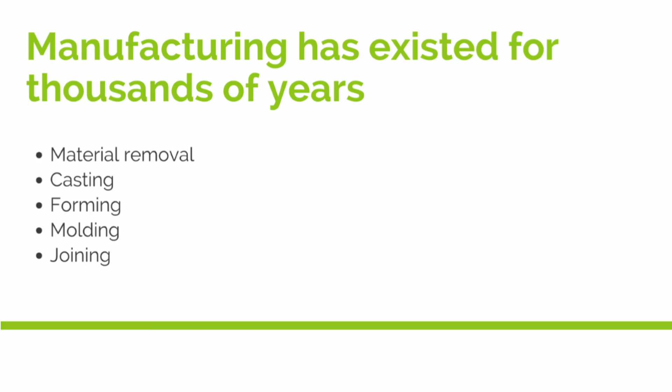So to put this in perspective, manufacturing has existed for thousands of years. Over the past thousands of years, specific manufacturing processes have been developed. We've developed material removal, or subtractive manufacturing, where you take a block and remove material to get your part. Casting, where you pour liquid metal into a mold. Forming, molding, joining. So over thousands of years, we have about 5 or 7 manufacturing processes.

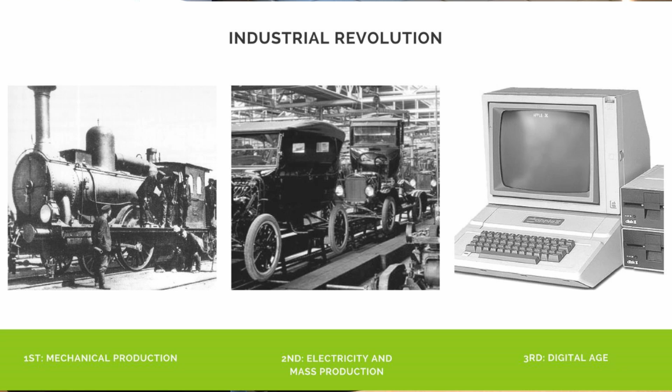And over those years, we've had some industrial revolutions go through. The first industrial revolution was when the steam engine was made, the mechanical revolution. Then a second industrial revolution where electricity was invented and also mass production, so the assembly line was created. We had a third industrial revolution with the digital age, computers, internet. And now there's talk of a fourth industrial revolution, which could involve cyber physical systems, artificial intelligence, IoT, blockchain, and additive manufacturing.

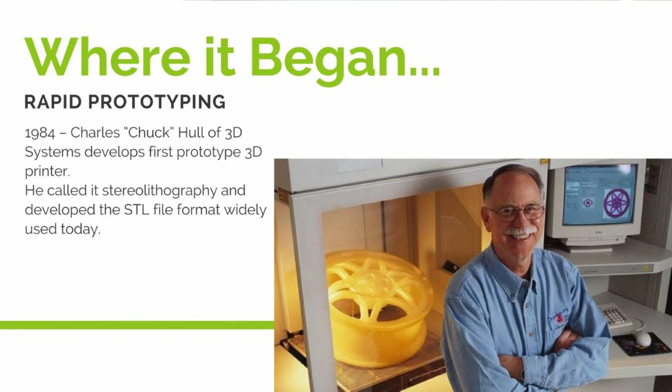So when and where did additive manufacturing begin? It actually began about 30 years ago, in 1984, by a guy named Chuck Hull. He invented additive manufacturing with the first type, called stereolithography, and he also invented the STL file that we use today. Since 1984, there have been 7 different processes of additive manufacturing invented, and they're listed above.

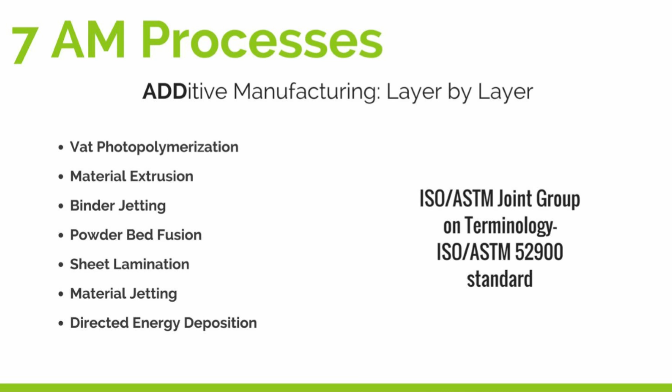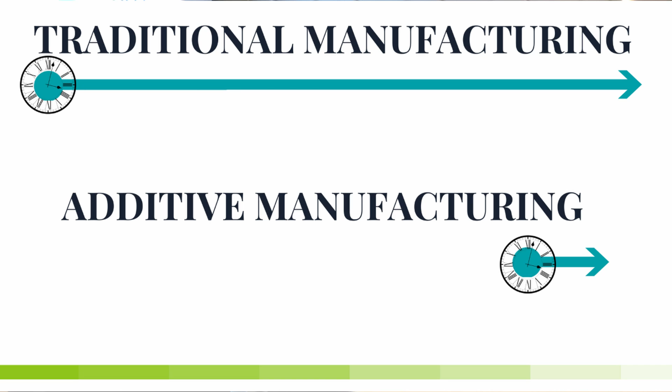So to put that in perspective: thousands of years we had traditional manufacturing, thousands of years, and we perfected it and have been using it for thousands of years. In the last 30 years, we had an additional 7 processes identified. 30 years. So what does the next 30 years look like? Just wanted to start off with that.

So let's jump right into additive manufacturing. There are 3 basic steps, and anyone can do it. You have your design, your slice, and your print.

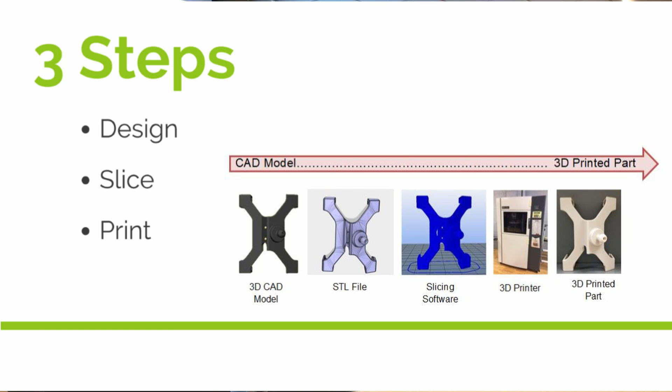Design, CAD software. Has anyone ever used CAD software before? Awesome, cool. What software have you used? Just CAD? AutoCAD?

Okay, cool. So computer-aided design software, there's hundreds of these. A lot of them are free, you can go online, download them, and start using them today. Fusion 360, all students have access to this great CAD software. It's almost like SolidWorks, if anyone's heard of that. It's very complex. People using it in industry, you can be using it today too. You download it right online, and students have access for free. Then there's ones like SolidWorks, Inventor, OpenSCAD, Rhino, CATIA, and the list goes on and on. This is where you take something you draw and turn it into a 3D model. So that's computer-aided design software.

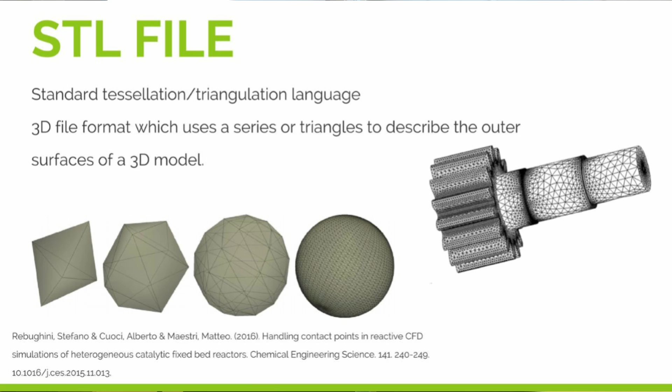Once you have your design file, you have to save that as an STL file, which stands for standard tessellation or triangulation language. What this does to your file is it takes whatever part you made, for example on the right, which was a solid part, and puts all these little triangles all over your part. The more triangles you put, the better quality your part is going to be. For example, the sphere on the bottom of the screen: if you only put 4 triangles on, it doesn't really look like a sphere, does it?

But the more triangles you add, the more defined the shape becomes. That's how you deal with resolution of your part and higher quality. That's how you get your STL file.

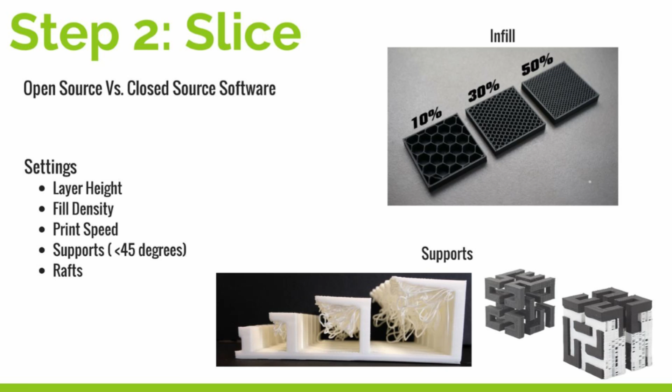Once you have your STL file, then we can go into slicing it. Every 3D printer, you need to slice your part. 3D printing is adding it up layer by layer. So in slicing software, you put it in there and can do all kinds of cool things with it. This is where you can play with infill pattern, layer height, speed, rafts, and support structures, which are really important.

I'll pass around this part. This part was stopped halfway to show you the infill pattern. You'll see a honeycomb structure inside. Your infill you can adjust however you want. You can make your part completely hollow inside, or 10%, 30%, 50%, all the way to a completely solid part. So you have the ability to control the density of your part.

I'll pass this around. Another thing you can do is add support structures. Anytime you have an overhang on your part, you're going to need a support structure holding that up, just like scaffolding on a building.

What's really cool now with 3D printing is, for example, this part down here. Some printers have 2 extruder heads. You can print one in plastic and one with your model material, one with your support material. So your part material is black, your white material is support. After this part comes off the printer, you plop it into water and your support dissolves away. So they're dissolvable supports, which allows you to create very complex shapes that you couldn't create traditionally.

I'll send around this part and it shows you the complexity of a part you can make. I'll also send around a part that shows you support structure. This is a little penguin guy. You'll see support under his nose, under his hat. And again, if they're dissolvable supports, you just plop them in water and they'll all dissolve away. Or if they're just your regular supports, you'd have to pick them all off. So you can see the before and after of this penguin guy.

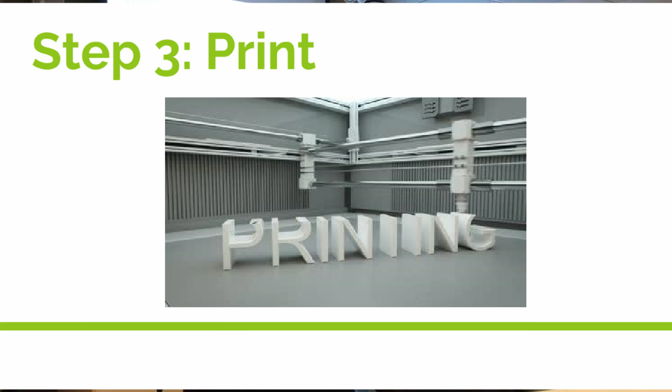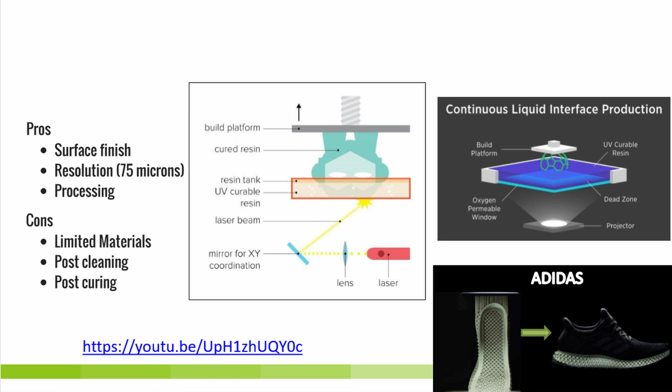Your third step is print. So you design, slice it, and you can go right into printing if you have a printer. Now we're going to get really technical real fast, but I want you guys to understand the possibilities in additive manufacturing. Most of the parts I just sent around are traditional parts made off a desktop printer, the kind you've probably seen, with a reel of plastic that goes into the extruder head, heats it up, and melts it down layer by layer. That's one type of 3D printing, but there are several types. I want to go over those with you quickly to show you what's going on in the world of 3D printing. This is the first type.

What it does is you have a liquid material, a liquid plastic called a photopolymer. For the girls in the room, it's like gel nail polish: you put it on as a liquid, it goes under UV light, and it hardens. That's the same process we're doing here, but layer by layer. A UV light hits the photopolymer liquid plastic and solidifies it, continuing layer by layer. This process is called vat photopolymerization — it includes a vat of liquid photopolymer. It's also called stereolithography, which I talked about earlier. This was the first type of 3D printing, invented in 1984. Now they've upgraded this technology, so the part looks like it's growing out of the liquid, which is really neat.

And I forgot — are we connected to the internet? Oh yeah, we'll have to get off this. I have quite a few videos to show, fun videos. Are they embedded in here? No, they're just links. Is that where you want to go? Yeah.

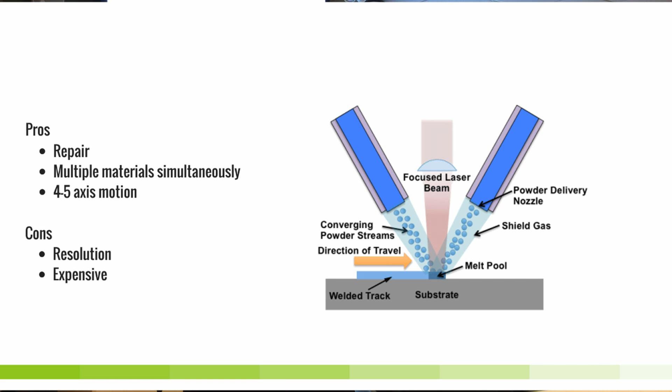The second type of 3D printing uses a laser or energy source, and your material comes through as a powder. The powder and the laser come together like in the picture, and it solidifies, doing that layer by layer by layer. If any of you have seen welding done before or heard of it, that's kind of what this is, but it's very glorified and can do a lot of cool other things.

This is the only type of 3D printing that's called directed energy... Oh, I'm not connected to that anymore. Silly. Okay, it's called directed energy deposition, and this is the only type of 3D printing process like this.

So normally, you're 3D printing in one direction, going layer by layer by layer by layer. This type of 3D printing is on a 5-axis head, just like a CNC machine. So it can deposit over here, deposit over here. It has 5 axes to deposit. So this type of process is used a lot for repair features, and I'll show some of that later.

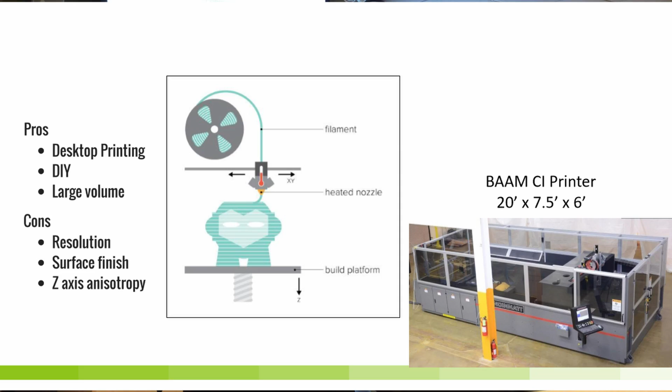The third type of 3D printing process, which you guys are most familiar with, is material extrusion. In this process, you have your plastic reel, or it could be a pellet form, and it goes into the extruder head, it heats it up, and deposits it layer by layer by layer, like a hot glue gun. There's a lot of cool things happening with this.

So we're familiar with the desktop printers, but there's big area additive manufacturing, or for short BAAM, where it's 20 by 7.5 by 6 feet long, and they're actually 3D printing bodies of cars in these printers, which is really neat.

Fourth type is called binder jetting. This process uses a powdered material. Any type of material can grind up into a powder we can use, so metals, plastics, ceramics, sand - this is what we're using.

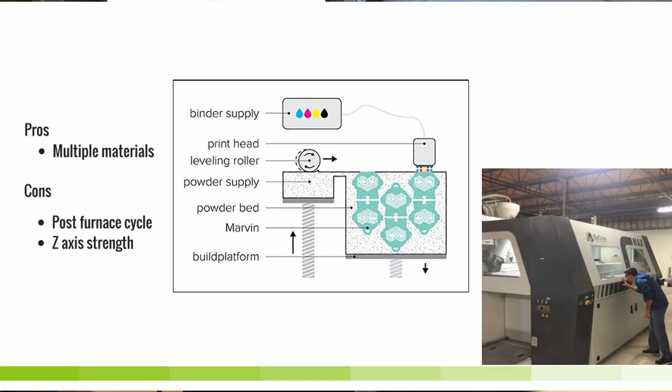How this process works: it rolls out a layer of your material, and then an inkjet head comes over and squirts out a glue-like substance. Just like an inkjet head on your 2D printer that prints with ink on paper, it's the same type of inkjet head, but instead of ink, it has glue in it. It does that layer by layer.

A huge industry utilizing this is the sand casting industry. If you're familiar with it, you make a mold out of sand and then pour liquid metal into it to get your parts. The automotive industry uses this a lot - Ford, for example, has been utilizing 3D printing for probably 20 years.

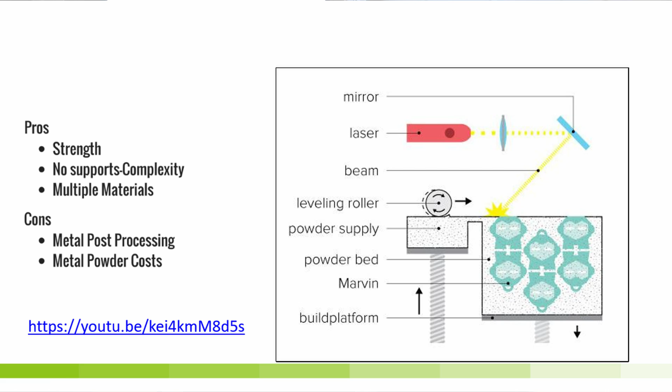Fifth type is called powder bed fusion, and I'll send some parts around that were produced by this. Again, it's a powdered material, but instead of a glue like binder jetting, it's using a laser. It rolls out a layer of your material and a laser hits that powder and sinters it, making it solid, and that happens layer by layer, building your part up.

I have a metal part here I'll pass around. It's a showpiece to show you the capabilities of 3D printing - lattice structures, support structures, internal cavities that really show the abilities of 3D printing.

So that's metal - I'll pass around the plastic one. What's really cool about this technology is all the loose powder that's not becoming a solid acts as your support, so you do not have to add any support structures for this type of technology. Anything that moves or has a space in between acts as loose powder, so you can create things that are movable without any assembly.

I'll pass these items around to show you that - and this ball bearing. Traditionally, a ball bearing is made with an outer case, an inner case, and they have to assemble every single ball inside - there's about 16 pieces that go into one part and it's assembled together. With 3D printing, this part comes out of the printer just like this, no assembly required, and it's able to move.

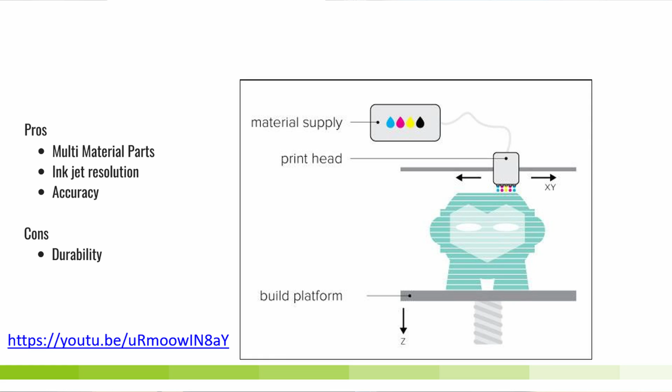The sixth type of additive manufacturing process is called material jetting. This also takes an inkjet head, but instead of a glue-like binder, like binder jetting, it actually has your material. So it's your liquid material, whether it's plastic or a photopolymer, and it squirts out that ink, your material, layer by layer by layer and builds up your part.

I have a couple pieces that were made by that process. What this allows is you can print with multiple strengths of material or multiple materials all at once. You'll see some of these pieces, like this one that has a hard outer surface, and then inside is very flexible, and this was all printed at once.

Then you'll see this little globe here. It looks like a gear is inside, and it looks like someone placed it inside, but no, this was all made layer by layer by layer. This process also allows you to use multiple colors at once, so I'll pass all of those pieces around. There's a lot of them. There's also a little gear that I'm passing around, and again, it wasn't assembled, it comes out of the printer just like that.

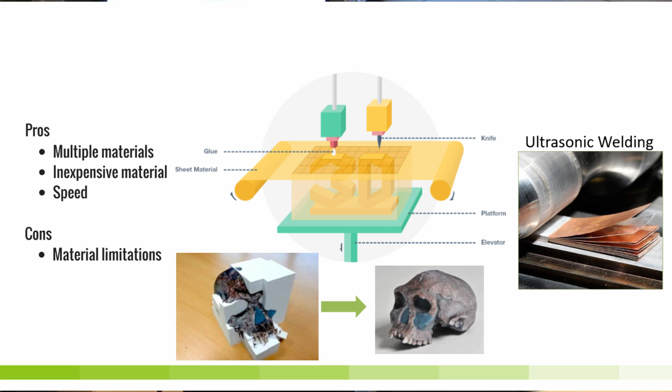And the last type of 3D printing, so we've covered 6, this is the last one. This is called sheet lamination. This process takes sheets of material, in this case limited to paper or metal. It takes a piece of your printer paper, glues it to the next piece of printer paper, and then a knife or laser comes out and cuts that layer. It continues layer by layer. Once you're done, you take your whole block, looks like a cake of white paper, like that skull, and you break it away to find your actual part. You're able to use ink as well, so you get cool colors and designs. I have one piece made with paper sheet lamination that I'll pass around to you.

For metal, how that works is with ultrasonic welding. You get a piece of sheet metal and ultrasonic weld it to the next piece of metal, and that continues layer by layer.

So we covered the 7 different types of 3D printing processes. Now I want to go over what materials we can use for additive manufacturing. The most familiar and used is polymers, your plastics, either in filament form, powder form, rubberized form, or liquid form. However we can get our plastic, we can use it.

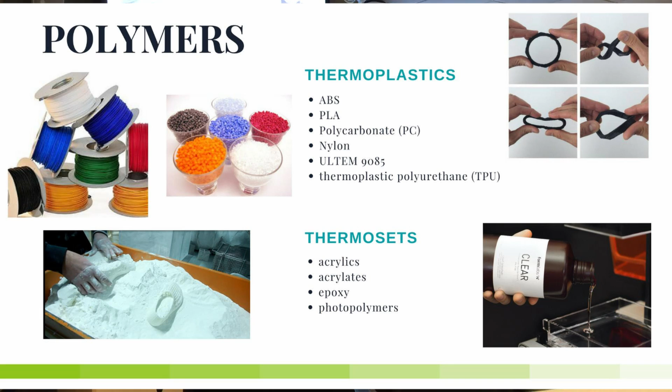Metals - if you can grind up your metal, you can use it in a 3D printer. So you have a whole list of metals. Pretty much there's no restriction to what metal you can grind up and use.

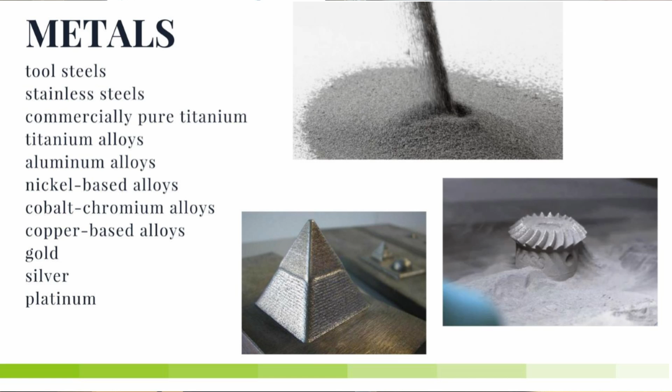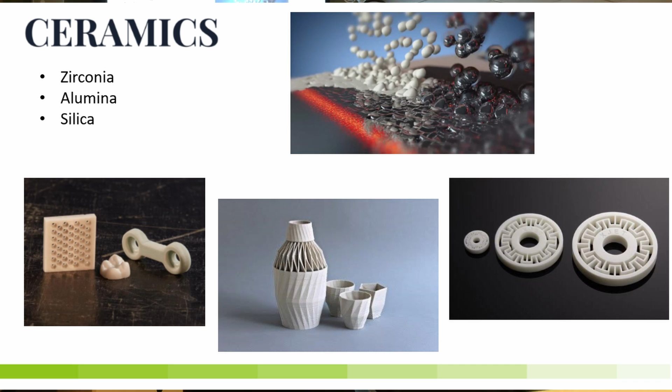Ceramics - I have a ceramic piece here, so your zirconias, alumina, silicas. The part I'm going to pass around was made with a material jetting process. It's a liquid ceramic slurry that gets jetted out, and then UV light cures it layer by layer. This printer is at the Youngstown Business Incubator where I work. It's from Israel, called the XJet 1400. It is the only one in the United States, and the 3rd in the entire world. If you ever want to come see it, we welcome everyone to see that and our other equipment down there.

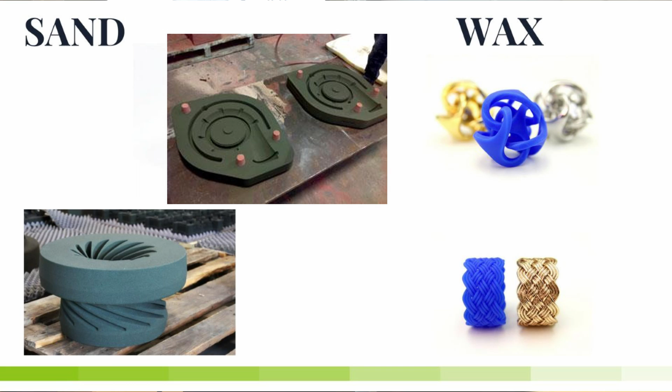We can print with sand and wax as well. I have these two materials on the same slide because they're used for tooling aspects. I mentioned sand casting before - has anyone heard of sand casting or investment casting? These are 2 types of traditional manufacturing. Sand casting has been around for thousands of years: you take a mold, fill it with sand, pack it down, then pour in metal and get your parts. With 3D printing, we can now 3D print the sand molds and cores and then pour in your metal traditionally. So we're just utilizing it for tooling aspects, not 3D printing end usable parts.

Another example, for wax, is the jewelry industry. All your jewelry - rings, necklaces, any very delicate or intricate metal piece - is made using investment casting. How investment casting works: someone carves out a wax pattern that looks like the piece of jewelry, for example the ring I'm wearing. They carve this out of wax, then dip the wax pattern into a ceramic slurry. It hardens, they burn out the wax, and then pour in the metal that becomes your actual piece of jewelry. That's how you get jewelry.

Traditionally, for hundreds of years, people would take wax and carve out shapes to make jewelry. Now with 3D printing, we can 3D print your wax out and then do it traditionally. So wax patterns and sand casting molds and cores are 2 ways we use 3D printing for tooling aspects. I'll pass this ring around - it's not made out of wax, it's made out of plastic, but we can also burn that out and utilize it for investment casting. A fun fact for any Cleveland Cavaliers fans: their championship rings were 3D printed wax patterns.

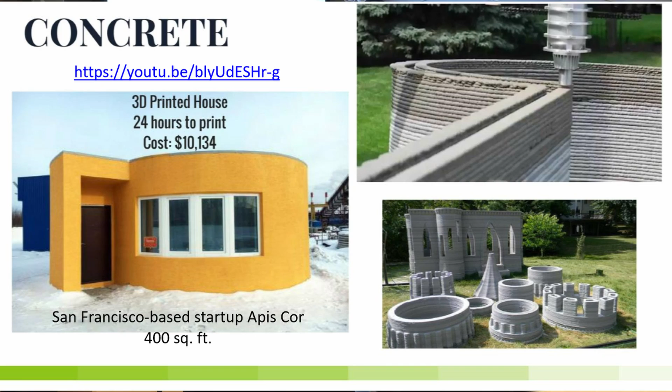400 gallons or 1,500 liters worth every hour. That's one bathtub full of concrete every 3 minutes. Concrete's perfect for this because you need something that you can squeeze out as a liquid and then very quickly turns into a solid. So as the 3D printer puts down layer after layer of concrete, it builds up a continuous solid wall.

This 3D printer is designed in a way unlike any I've ever seen before. Its main body is in the center and it has a long arm that can travel in a full 360-degree arc and move in and out. It can print up to 1,420 square feet or 130 square meters, the size of a 3-bedroom house. The only thing the robot can't do are things like structural beams, windows, doors, and the roof. These things are still added by good old-fashioned manual labour.

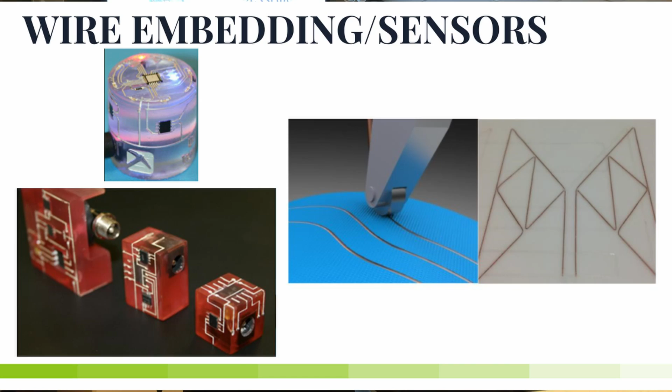Wire embedding. So not only can we print with plastic, but now we can print with plastic and also embed wires while we're printing. UTEP, University of Texas El Paso, has one of these systems. They produced it. It's called a multi-3D printer system. It has a 3D printer that prints in plastic, and then it'll pause, it'll embed wires, and then it'll continue printing plastic. You can see some of the cool things they're doing with CubeSats, little satellites they send up into space. They can embed all the wires and stuff, send them out. They'll collect all the data and they'll come back. I don't have any of the wire embedded pieces with me today.

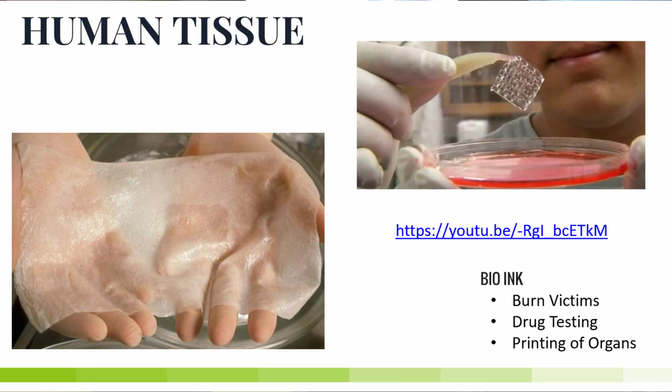And human tissue. Another really cool material that we can really start looking into is the human tissue. You have an example of skin up there. Some of the reasons we want to do this: burn victims. If someone was really badly burned, we can go ahead, scan their arm, and deposit new material down onto their arm. I'll just have this video play, and it'll talk about the rest of the cool things that are going on.

I'm Dr. Bonassar, and my lab makes ears. The invention that we've discovered is a way to print living cells in a material that can be used to reconstruct tissues in the body. My laboratory is interested in regenerating cartilage wherever it's found in the body. The process starts with a scan of an ear. We sit someone down in a chair, and we have a camera that spins around their head and takes a 3D image. We then can very precisely map out the topology of the ear. The next key step is developing the ink for this printer. This ink is actually a living ink. It contains living cells. It's alive when we put it into the printer, and it's alive when it comes out. The real power of the printing technique is that it can be used to make geometries that you just can't make with any other technique. You can make parts with holes in them. We can layer and cover and put different cells next to each other to create really the complex organs that make up our bodies. After 2 months in an incubator, the tissue fills in and looks white, just like real cartilage. The implants that we're making are not rubber or plastic. They are alive. They grow inside the body or out.

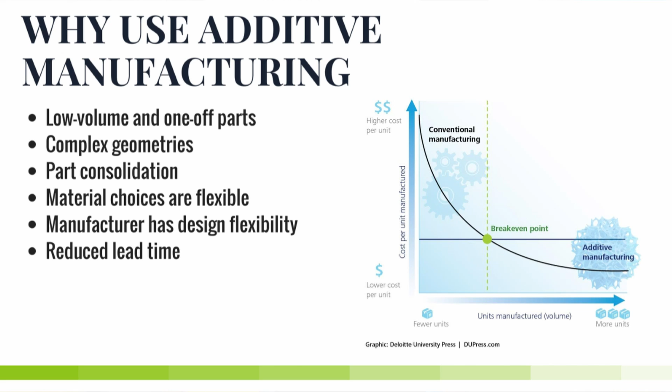Okay, to quickly go over why we would want to use additive manufacturing: it's really cool, everyone wants to use it, and a lot of the population refers to 3D printing as that desktop printer where you make little trinkets, keychains, and cool things. But as I just showed you, there's a whole other area, and people have been using it for 30 years now. So car parts, the automotive industry—Ford, GM—the aerospace industry—Boeing, Lockheed Martin, GE—they've all been utilizing additive manufacturing, and they're all utilizing it for low volume. You're not going to mass produce with additive manufacturing, at least not right now. It's low volume, high customization, and high complexity. Put all those together and you have a great area for additive manufacturing.

Part consolidation is another benefit—I might have examples later. You take a part that used to be 30 pieces assembled together, and now it's one piece. So you're saving on time, energy, no more assembly is required, plus reduction of material and weight. There's also reduction in lead time and reduction in tooling costs. There's a whole area of reasons why you'd want to use additive manufacturing—you just have to find that sweet spot and get into it.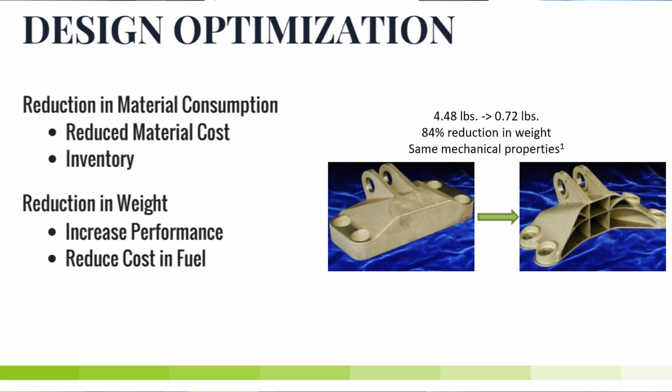Design optimization is a huge area for additive manufacturing, and this is where the hurdle is in 3D printing. For thousands of years, we've been designing for traditional manufacturing. We've had restrictions on designing, told to design a certain way. Now with 3D printing, design is kind of free. You have the ability to create anything. Anything you can design in a CAD software, you can now 3D print it out.

And you can utilize this to reduce weight and create complexity. For example, this is a GE engine bracket. Traditionally, it's a block of metal, and you shave away to get your part, so you have wasted material that you scrap, and the part is 5 pounds. With 3D printing, it's now under 1 pound, an 84% reduction in weight. This is a part that goes on an airplane, so less weight means less fuel consumption, which saves costs.

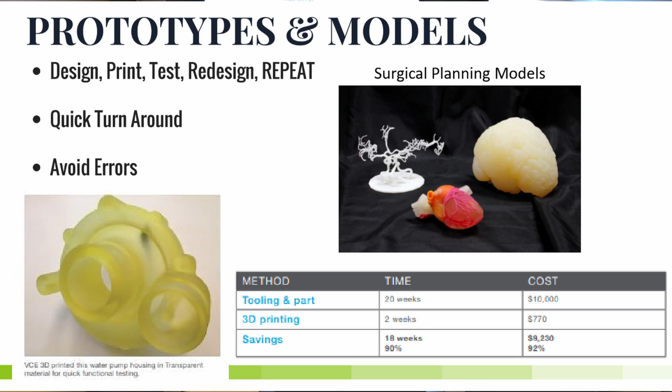Applications for 3D printing, and I've been talking about them throughout, but prototypes and models. This is why 3D printing was originally invented, for prototyping. You can quickly 3D print an item out, test it, see if it works. If it doesn't, you go back, redesign your part, and 3D print it out again. It's a very quick turnaround time, allowing for different design iterations fast.

And then models. For example, back to the medical industry, they're using models for surgical planning. They can 3D print out the patient's heart or brain, see what's going on, do the operation, see how it's going to turn out, and then actually go forward with the surgery.

Tooling applications, so I talked about this briefly, sand casting and investment casting. This is a huge area for additive manufacturing. It's the low-hanging fruit because we don't have to do qualification and certification, since you're just printing the tooling and making the part the normal way you would.

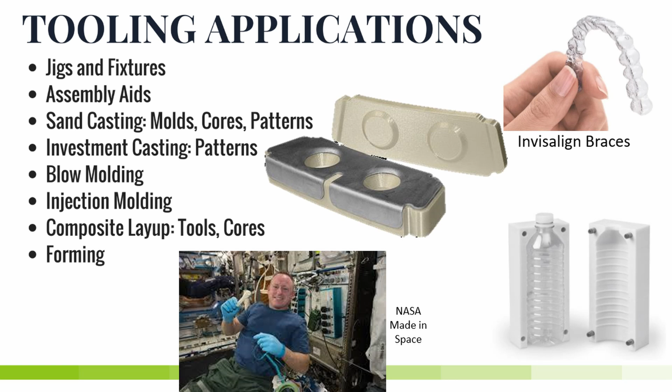For example, Invisalign braces - are you guys familiar with Invisalign braces? They don't 3D print the plastic piece you put in your mouth, but they 3D print the mold, and then that mold they vacuum form plastic over, and that's how they get your braces.

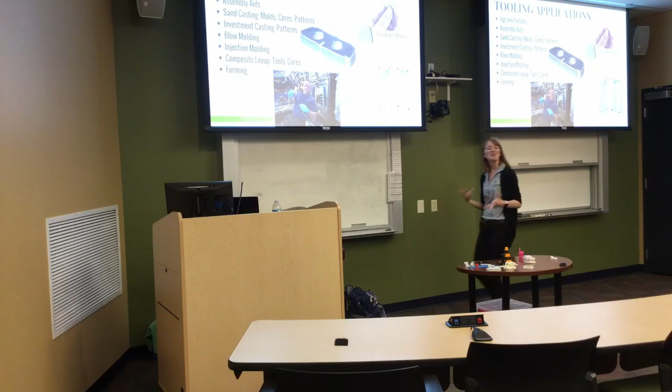So Invisalign is producing these molds in quantities of millions. They are mass producing using 3D printing with mass customization, because every human body is different, so your mouth is going to be different from mine. That's why 3D printing is perfect for these molds. The dental industry in general, the medical industry, is perfect for additive manufacturing.

As your teeth move, they have to make a new, correct clear brace, which means they have to scan again and make another one. So it's not just one mold - they have customization from human to human, but also customization over time, since you get a different retainer every month or few months. So every single one of those is a different mold, which is being 3D printed.

I have a picture of the International Space Station. NASA is into additive manufacturing - they have 3D printers up there. To give an example for tooling, if they needed a tool, they would tell us down here on Earth, and it would take about 3 months for them to get the tool back in space. Now they have a 3D printer on the International Space Station, so if something breaks or they need a tool, they can just 3D print it out and get it when they need it.

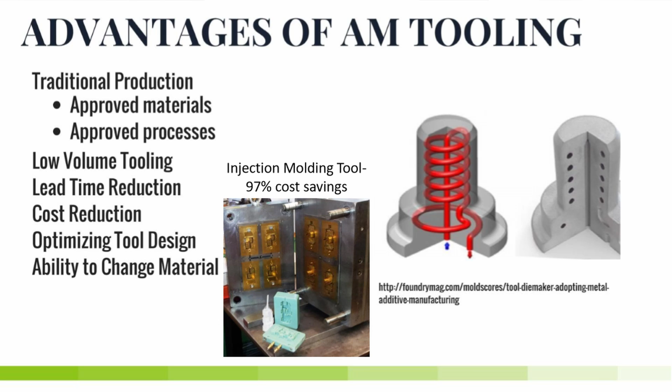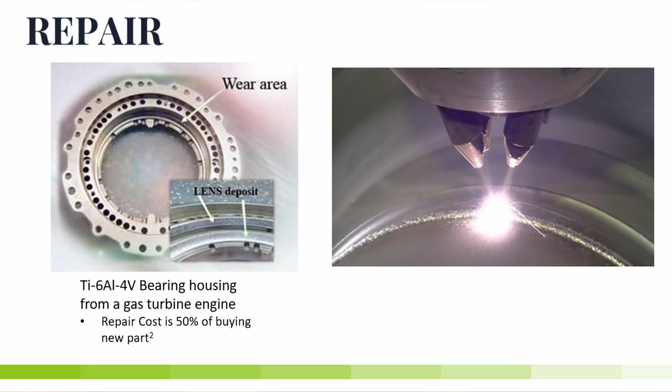Repair - so I talked about this briefly. This is with directed energy deposition, the metal process. There's a study of a bearing housing: if it gets worn, the company just scraps it, no matter what. But with 3D printing, with directed energy deposition, which is the 5-axis printer, they can put that part into the printer and it will deposit new material back onto where it's worn, or if it's broke, deposit new material. Doing that is 50% savings versus buying a new part - that's an example of repair.

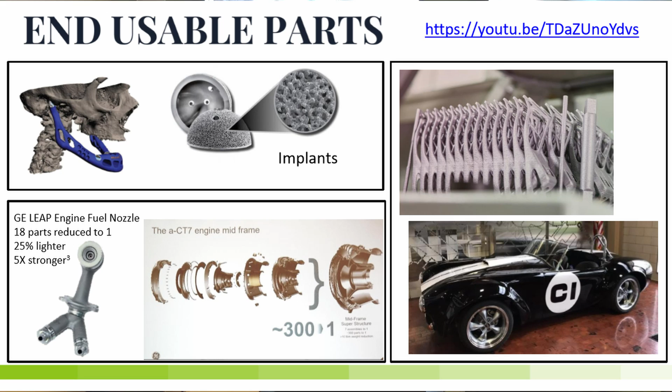And then, of course, end usable parts. This is where additive manufacturing is going - everyone wants to print end usable parts. I have some examples from the medical industry: a jaw replacement, and also hip implants. Hip implants are a great example of additive manufacturing - you'll see up there, that's the ball.

Not only can they 3D scan to make the implant perfect for your body, but they're also adding a lattice structure to the hip implant, which enables bone and tissue to grow inside the metal part and become part of your body. It's really neat what the lattice structure can do. It's like that metal piece I passed around, a very complex shape that allows tissue to grow into it.

I talked about part consolidation before. These are two great case studies.

GE is doing a lot with additive manufacturing. The first one is the GE LEAP engine fuel nozzle. This part used to be 18 pieces assembled together. Now they print it as one part, and it's 25% lighter and five times stronger than the original.

They thought, oh, that's not good enough, so then they went to the next part. This part is 300 pieces assembled together; now it's one part. Then they have another example, I think it's like 890 pieces that they assembled together, and now it's like 13 pieces, which is amazing because to assemble all that, the time, the money, it's a lot, but now it's just printed as one piece.